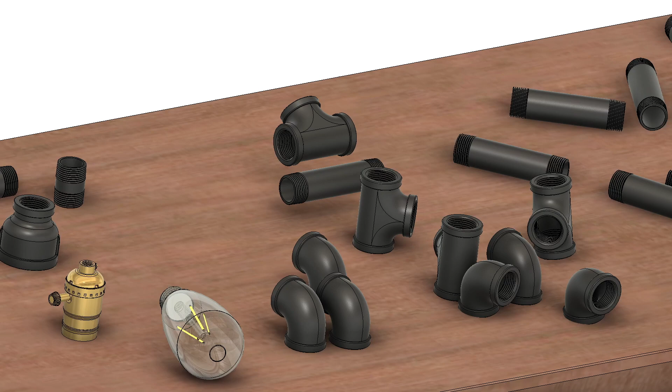In this tutorial, you will learn how to make this black pipe lamp. You will learn the fundamentals of downloading parts from an online catalog and using them for your lamp design, how to properly copy and paste, rename, and join together components so that you will be able to create your own style of lamp.

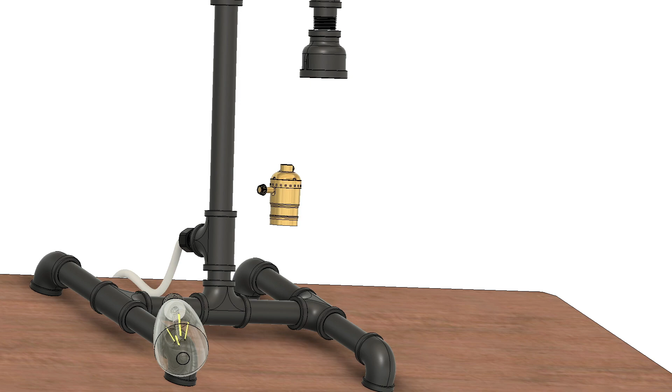So let's just take a quick tour of our lamp. We can see that there's various different parts here. We've got T's, we've got straight pieces, we've got elbows, we've got a reducer up here, we've actually got our fixture for the lamp to screw into.

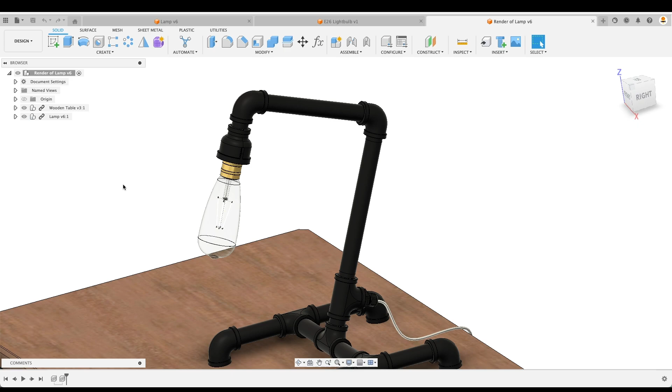We also have a couple parts over here that connect our cable. We've got a cable gland, and then we've got another fitting here to reduce from our 3/4 NPT down to a 1/2 inch. So now that we've taken a little tour, again, this is just a sample. You are more than welcome to do whatever searching out there on Google to find the lamp that you like and design it in Fusion 360.

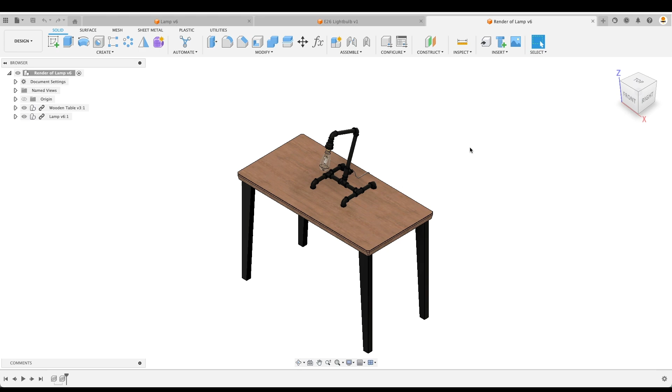So let's get to it. First thing, we're going to create a new design. What I'd like to do with all my students is tell them the very first thing we always do is save it. I'm gonna call this lamp design tutorial.

Now 99% of the parts that we're going to use to create our black pipe lamp are all taken from McMaster. So if we go to Insert and then McMaster-Carr Component, they're all taken from that. But here's the thing, McMaster has specific and specialized components that are hard to find in generic places around your town. So most of these parts, well, all the ones that we're going to bring up in our design today, will probably be able to be found at your local home center.

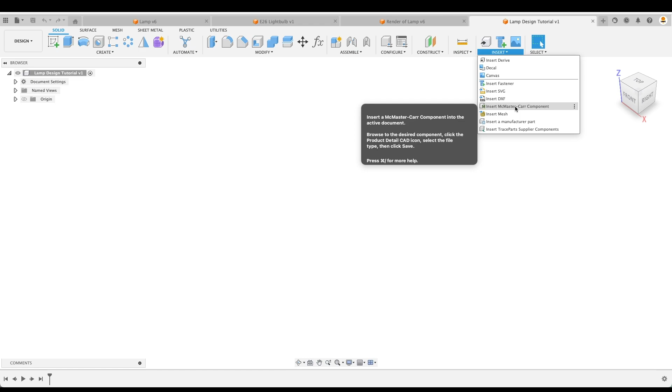I've actually made 2 lamps myself where I bought all of the black pipe at the local home center. However, if you don't have one or you think it's more convenient to buy something online, I've also included links below that will show you where you can buy different black pipe items online.

Either way, let's get into it. So the first thing we're going to do is insert. We'll go back here. We're going to insert our main component, and so this is what kind of brings our entire lamp all together. So we'll call it our foundation component.

Let's do that. We're going to go Insert McMaster, and right from our search menu, I'm just going to type in black pipe. There we go. And we have black pipe and black pipe fittings. So let's go black pipe fittings.

Then here in our left margin, we are going to go to our pipe size. Now at local home centers, you'll find anything from 1/4, 3/8, 1/2, and 3/4. We're going to make it out of 3/4. That's going to be a pretty beefy lamp design, but it's going to last a long time and it's going to be fun to put together. So let's just stick with 3/4. You could go with 1/2 as well. It's going to be a lot less expensive for 1/2, but let's just do that, 3/4.

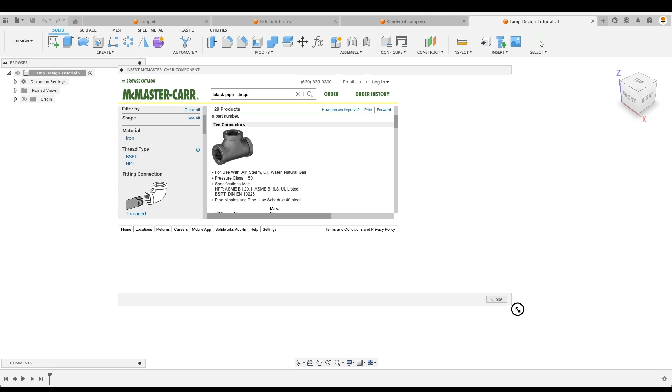Now, as we pick that, we can go to the first one here, low pressure iron and steel threaded pipe fittings. And then on the left, look at all the different types of fittings, the shapes that we have. And we're just going to pick our T. If we flip this upside down, well, we've got a T shape. So let's pick that. And then we're going to scroll down here. We can always make this window bigger. Let's just do that now. And here we're going to see the basic T connector.

If we go down, we have a right angle T. We've got inline reducers, right angle T reducers—they're slightly different—and dual T reducers. Let's just stick with the first one, T connectors, and we have 2 types of threads here.

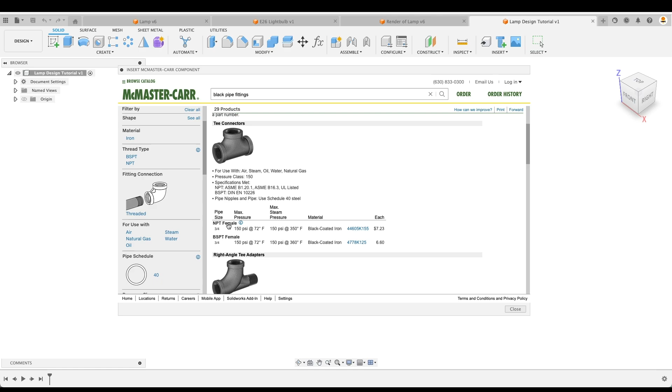Let's just stick with NPT. These are found most often, and we can also use them to connect some basic other components which we'll need to finish our lamp. So we just click on the part number, and now for our CAD file. If there's no CAD file here, we cannot download it.

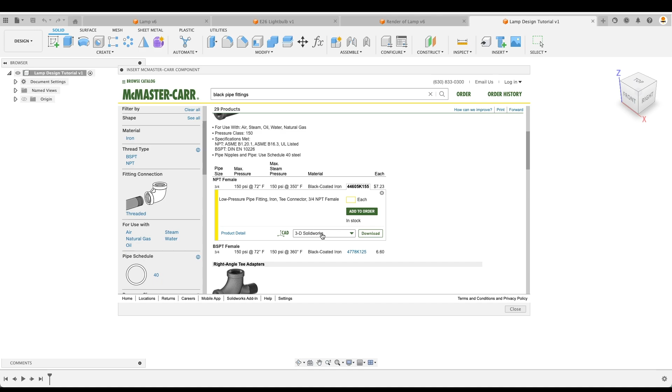There are many parts within McMaster-Carr Catalog which we cannot download. However, if there is a CAD file, this is great news for us—we can download it. But we're not running SolidWorks here, we're running Fusion 360. So what file do we pick? Well, most find that 3D step files are what is best to be used, and that's what I like using. So make sure to click 3D step and download.

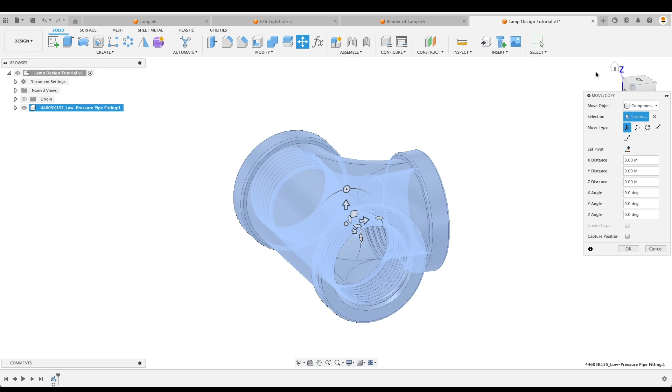So once we download this, we can change the angle. And again, if we were to look at our original lamp, this has a slight angle, and we're going to put it at 70 degrees and go OK.

Now, we have taught this before—we can actually move this part around. So we're going to capture the position. We can still move it around. So if we're moving it around and we want it to go back to its original spot, we just go revert.

Since we don't want this moving, it's going to be one of the foundation parts of our lamp, we have to go right click and ground. You'll see a little pin here beside our component, and now as long as I click on it and try and move it, it won't be able to be moved.

So before we move on, let's just take a look here at our part number. This part number tells us nothing about the part other than the part number out of McMaster-Carr. However, if we're going to go to our local home center, we're going to have to use terminology that they understand. So what I like to do is just encourage you to think, and this comes with experience as well, but I'm just going to call it a 3/4 inch T black pipe fitting.

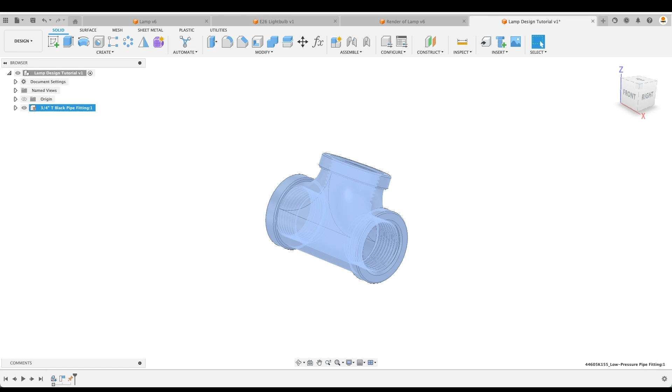There we go. If you were to take this to the local home center, they would be able to understand what you're talking about. But if it's just the number from McMaster-Carr, they would have no idea what you're talking about. So try and use terminology that someone else would be able to understand.

So the next item for our lamp are going to be these straight pieces right here. And they're threaded on either end so that we can actually thread it into our connectors. So let's do that—they're 4 inches long. So we're going to go back to McMaster-Carr.

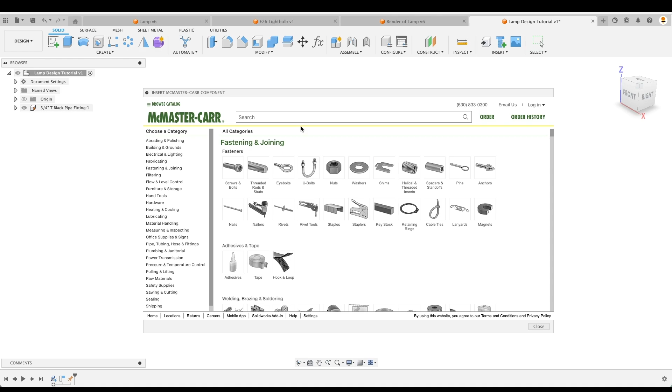Again, I'm just going to make this bigger for the sake of those tuning into this tutorial. So we're going to say black pipe, and instead of picking fittings, we're going to pick black pipe. We'll pick the first one here. Pipe size is going to be 3/4 again. And we're just going to scroll on down and look at what we have.

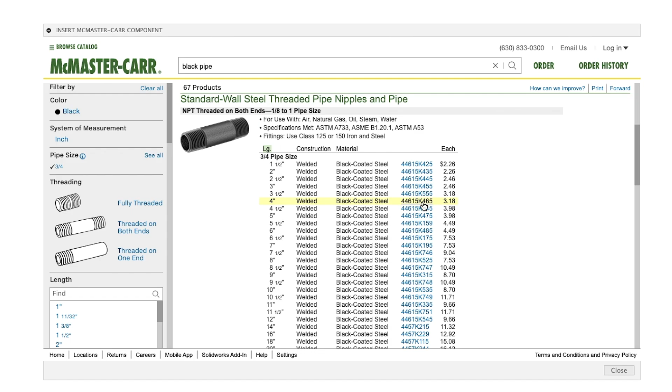3/4 NPT, and we're going to find the 4-inch length. You can see length right here, 4 inch. Let's select that. And again, we have 3D step file, so let's download it. And don't worry about position right now.

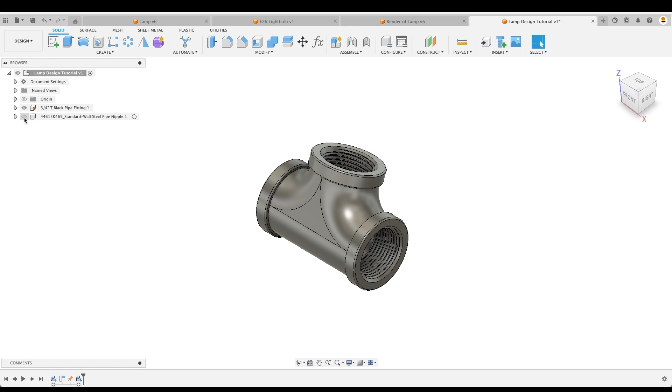Let's just go OK. Now, sometimes with Fusion this is a little bug that I've been finding—if this happens where your part disappears no matter what you do, oh there we go, okay, sometimes that works. We can just make it invisible and then visible. If not, just activate your component and go back to your master assembly and activate that, and it should come back on your screen.

We can click and drag this off to the side. Don't worry about orienting it—that's what joints are for. So we're going to go joint.

Now, here is something my students were having a difficult time with, is where do you join this? Well, if we were to join on our face here—and again, there's many ways of doing this—just to summarize, we can hover over the face, press Command or Control, depending if we're running Mac or Windows.

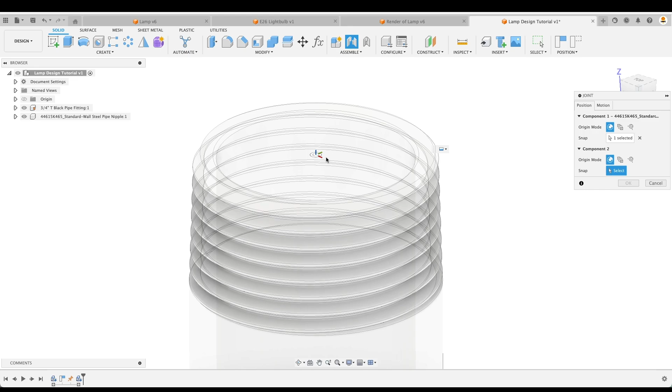If I hold down Command, I can select the middle point. If I don't hold down Command, that point will disappear. Or I can click the face, it turns blue, but all of the different snap points are still located on that face, and now I can pick the center.

But let's just say I pick that, and I pick this point right there. Well, what's the problem? They're not actually connected like they would be in real life. So we can't select that point on our pipe to join. What's the point that we need to pick? Let's go back to joint, and the shortcut, everyone, is J.

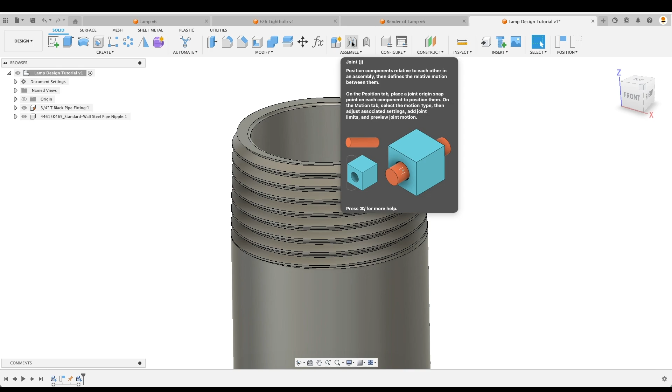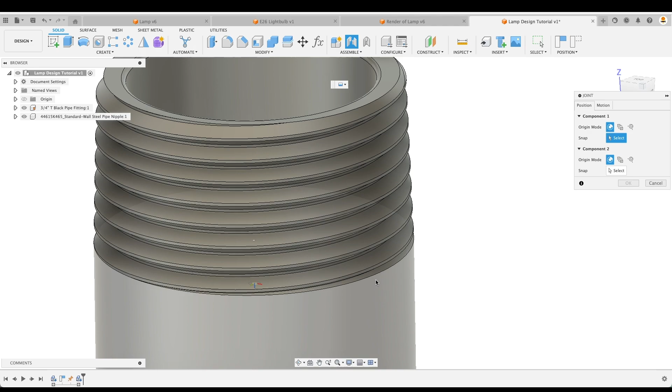We can see that right there. So J for joint. Now, I need to pick this very bottom circle right here. As I do so, you can see that the snap point is in the middle of the part. If I hold down Command, there's the snap point. It should be in the center of our part. But look, if I pick the wrong point, look at where my snap points are. It's off on the side. That won't help us. We need to pick this line with the snap point in the middle. And now I'd be able to pick this face, center, click again.

Sometimes our pipe flips the other way. If that's the case, we just go down to our joint dialog box. We're going to flip it. And there we have it.

So another principle that we're going to use here, eventually I'm just going to design this. You're going to see me finish it almost in its entirety, but just to talk about some of the principles.

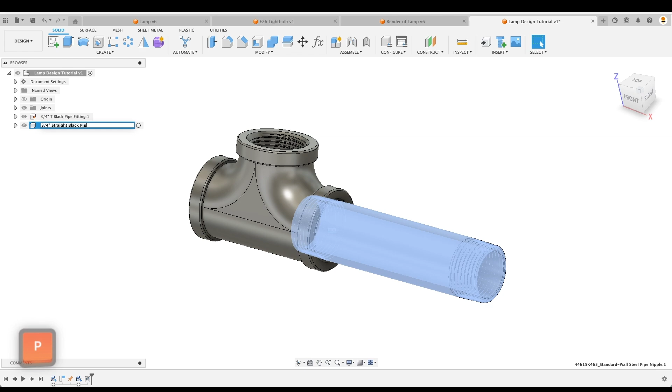Let's go up to our naming convention first. We're going to call it 3/4 inch, and here we're going to call it straight black pipe, just straight black pipe. There we go.

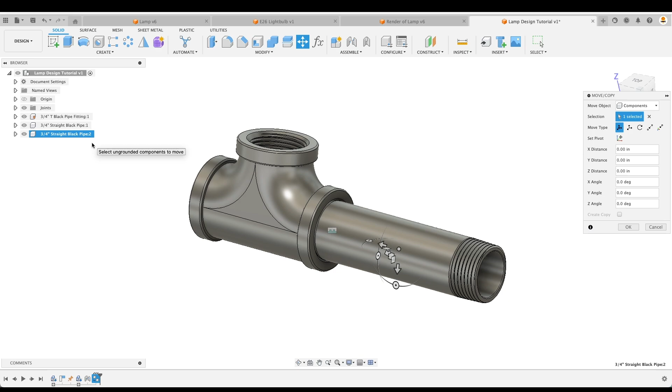Now a principle here is if we want to copy it, we need to go right click, copy, and there's our shortcut copy. We can just right click on our screen and go paste. And as we do so, look at what happens. We've got straight black pipe 1, straight black pipe 2. Every time we paste it, it's going to add an incremental number to the next in the series, which makes it very easy to find what we're looking for.

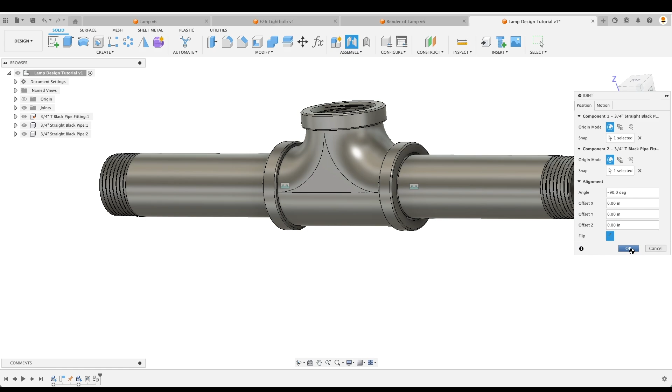So let's just move that pipe off to the side. We're going to do the exact same thing. Joint, make sure we pick the right spot. And we're going to pick this face, the center point, flip it. Oh sorry, there we go, flip it. And we're well on our way to making this thing work out really nice.

Again, we're at 90 degrees right here. If we look back at our lamp, we've got other T's here which are in line horizontally. So let's go back there.

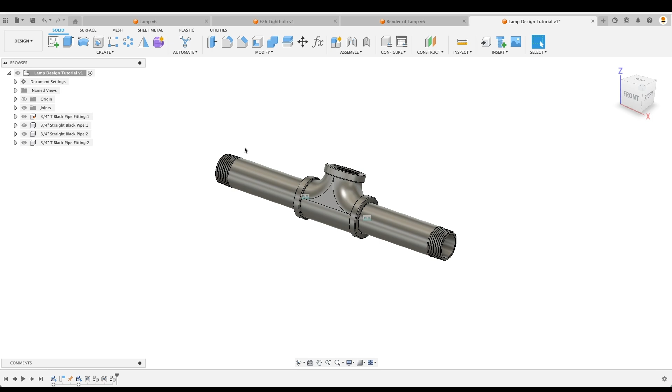We're just going to copy our T's. If we're trying to find a specific item in our browser, we can just click on it and look what happens. We have these dashed lines, these angled dashed lines over here. That's the part that we want to copy. So right click, copy, right click, paste, and we're just going to do 2 of them. Right click, paste again. So now we have fitting 2 and fitting 3.

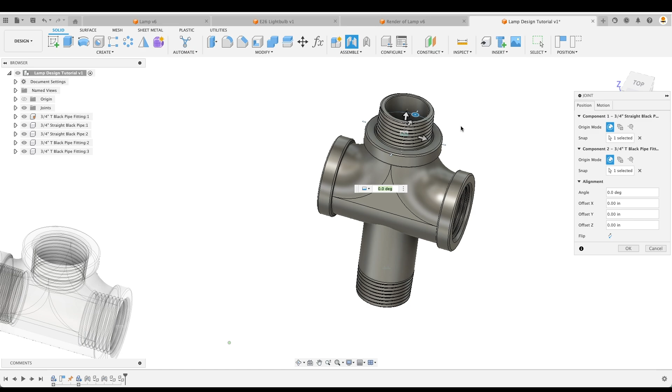We're going to click fitting 2, move it off to the side, fitting 3, move it off to the side, and let's join these now. So here we're going to do the same thing. Pick the circle on our male pipe there. I'm going to pick this guy right there. And let's see if we go okay.

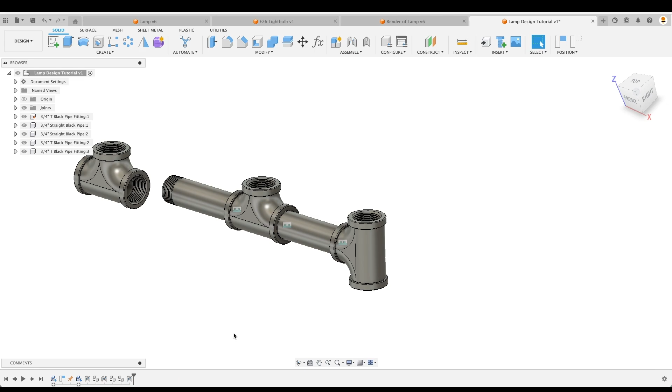Well, obviously this is not lined up properly. So now we're getting some issues. Let's go here to edit. Now that should not be doing that. So let's just go back in time here. Okay, so that shouldn't be moving. Why is it doing that?

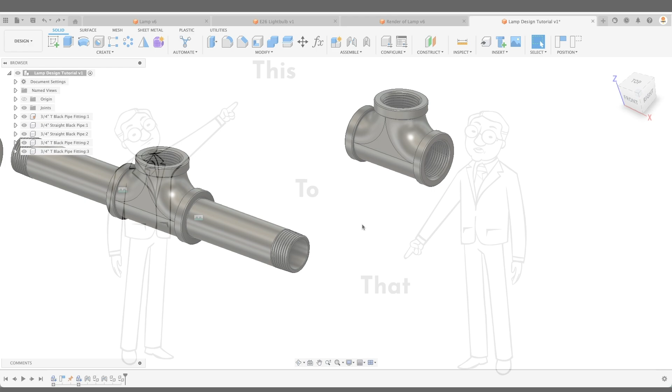Okay, let's move. Oh yes, we have to move. Okay, so here's a good lesson. I clicked on the pipe first and then our T fitting. Remember the lesson here is when we're joining, we move this to that. In English, we say this to that. We never say that to this. So we move this floating piece to the one that we want stationary. Again, move this to that and it won't mess up on us.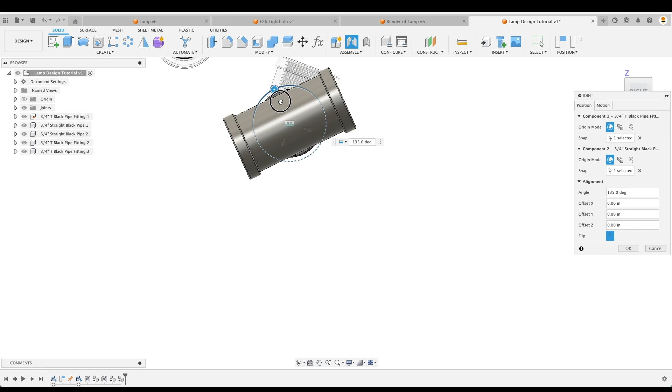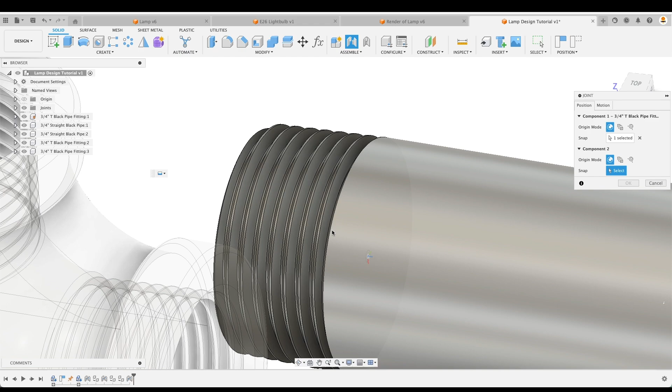There we go, we can just adjust our angle. If we want to make it right, we go -70. So if this pipe was at 70, we go -70 to make it horizontal. There we go, let's join the other side. See here, I'm picking the wrong snap point. I need to move over to our circle so the snap point is in the center of our pipe. There we go, and here as well I need to make sure it's horizontal, so we're at 70 degrees. There we go, we're well on our way.

So quickly, I'm going to copy and paste these straight pipes. We want to make 4 of them. If we look back at our lamp, we've got 1, 2, 3, 4. So let's quickly do that. I'm just going to go Command V, Command V, Command V, and that quickly pastes those items. So move those off to the side and let's join them together.

Okay, as you can see, all of our joints are working out really good so far. So the next thing we need to add are these elbows, the 90-degree elbows over here.

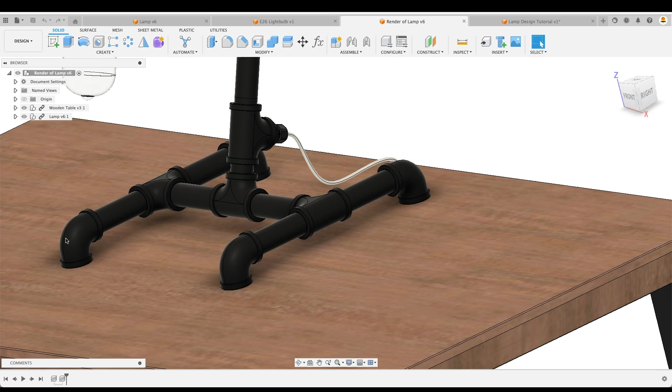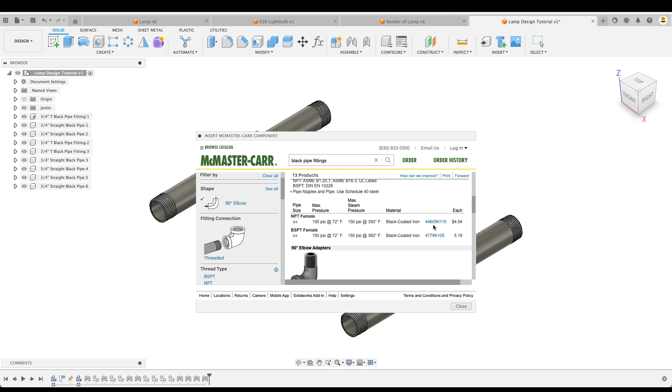So let's go back to McMaster and find those elbows. There we go, in our shape we can just pick 90-degree elbow. And it's good to familiarize yourself with different types of fittings here. But let's go to our elbow, and there we go, NPT female. And here I'm not even going to worry about orienting it, I just want to go OK. Let's not worry about renaming it right now because I'm going to show you something that's really cool.

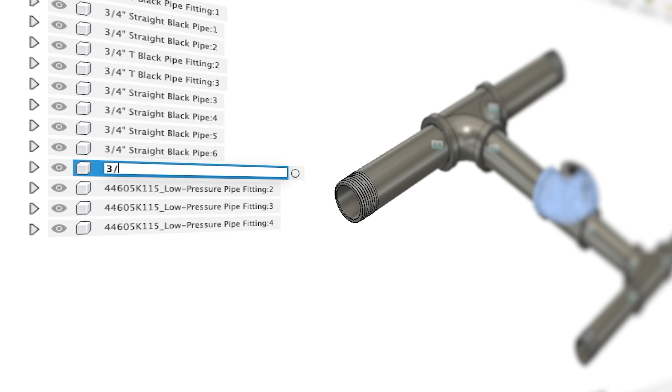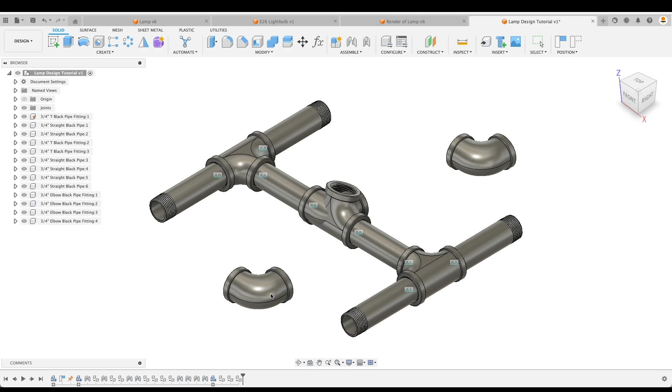We're just going to go right click, copy, Command V or Control V. Okay, 1, 2, 3 more, we've got 4 of them. Now because we've copied and pasted, we can right click and call this 3/4 inch elbow black pipe fitting. Now look at all the others in our series here - because we've copied and pasted them, if I hit enter, they all update correspondingly. 1, 2, 3, 4. So let's pick number 1, I'm just going to move those off to the side in their locations, and let's assemble.

Well, would you look at that? It's coming along very well. So at this point, it's good to save.

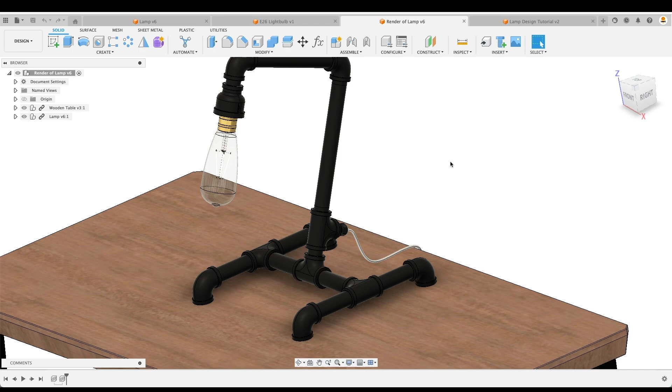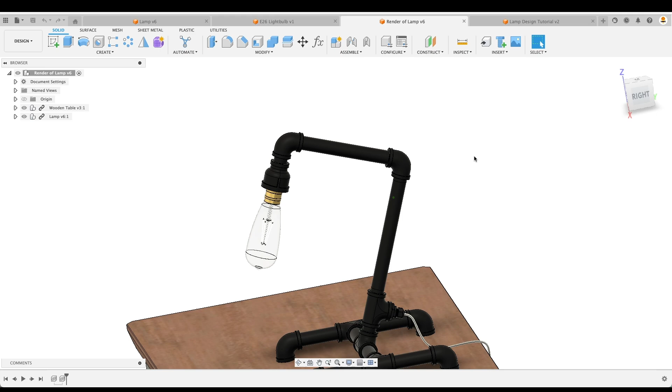Now there's no right or wrong way of doing this. I just looked at an image of a type of lamp design on Google that I really liked, and I just created it from there. I guessed at the lengths, and so that's what you can do too. So now we've got another, this is just a short piece, I think it's only 1.5 inches. And this one over here is 10 inches long, and then we've got another T. So let's download our 1.5 inch length and then our 10 inch length as well. And I think this one, I want to make a little shorter actually, maybe 6 inches long. So we've got 1.5, 10, 6 inches, let's go there.

And I just realized I forgot to call it our 3/4-inch straight black pipe, so let's do that now. There we go, okay, so we've got our 1.5. Let's download our 10-inch.

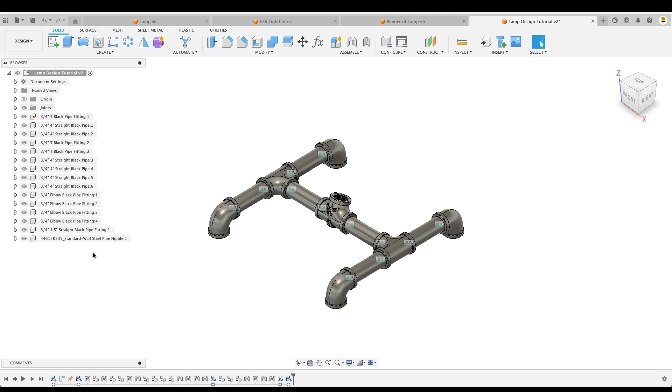We're going to do the same thing here. See there, it disappeared - we can just activate our main assembly and it should reappear. So we can copy and paste our text as well. Command C, and then Command V, and we're going to call this 10-inch straight black pipe fitting. And we'll do the 6-inch length as well.

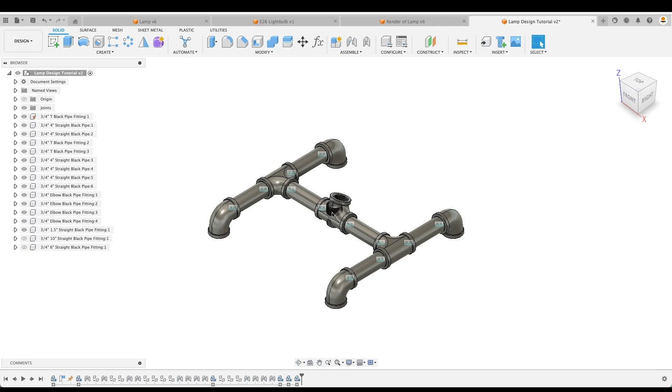Okay, so we're just going to hide those for now. Remember, if we're finding it hard to grab the part we want to move, we can just click on it in our browser. It will turn blue, and that will be the part that moves for us. So let's assemble this, we'll put another T there. We go back to our T fitting, copy, paste.

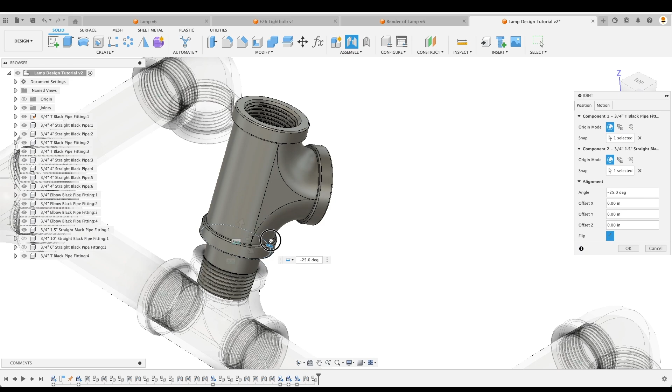So if you're ever unsure about the angle, just go to the proper face. Let's go to our back, and here it's the proper angle. So again, if we're unsure about where this should be positioned, there we go. This one's going to be at 0. Sometimes it will say 90 or 180 depending on how we join it. But there we go.

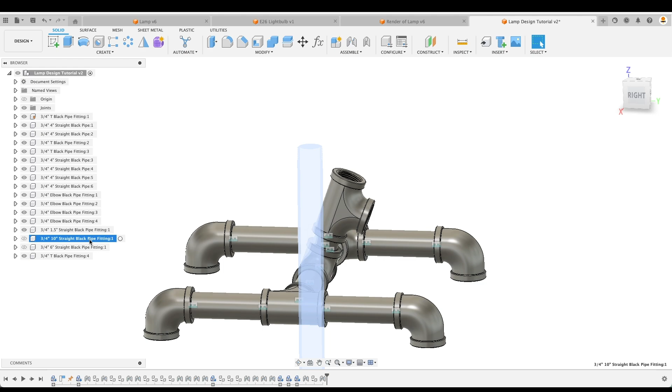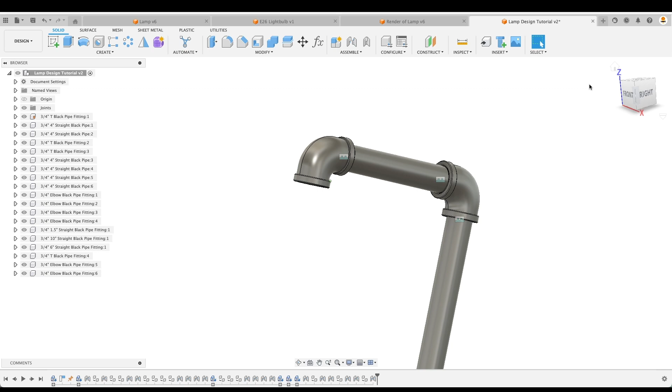All right, let's go to the 10-inch here. Make sure we make it visible. Great. Now we're going to put our elbow right there. Now the 6-inch piece. Another elbow. Okay, at this point, let's save our lamp. Now you can see that we have a ton of the little symbols here for our joints. We can just turn those all off by making them invisible. There we go. Let's go back to our lamp here.

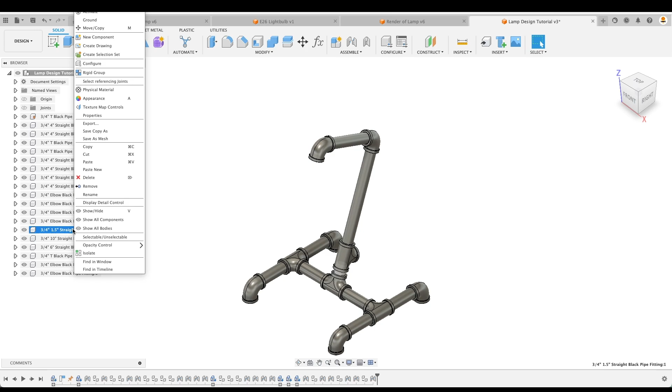Now we have another short piece, and we have what's called a reducer. And then we have the fitting for our light bulb to screw into. So let's just use our 1.5 inch length, and then we'll have to get this reducer right here as well. So let's do that. And this is where it's very handy to use a good naming convention for our parts. So right click, copy, right click, paste. We'll join that.

Okay, so before we find our reducer, we have to look at the actual size of this little lamp housing here. I should go to the lamp. That's the right one. So if we zoom in here, the reducer that I found is 1.25 to 3/4, and that depends on the size of this little lamp socket. The reason is when I created a lamp in the past, I ended up just using a little bit of epoxy in here to connect the lamp socket into the reducer.

Now this would be really good if you went to your local home center and you found this lamp socket. You could always compare the size of it to the reducer to make sure to grab the right reducer size. However, we're just going to follow suit with this tutorial. Again, in real life, I don't know what they're selling at the local home center. So you just have to compare. You're going to have to grab this package. You'll probably have to buy it ahead of time in order to open up the package and then compare it with the actual black pipe.

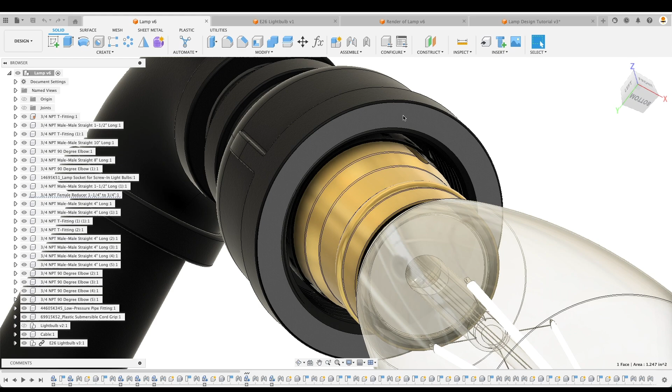The lamp socket is in a package. The reducers are rarely in individual packages. But anyways, later on, you can just epoxy them together. Once you've run your cable, put a little bit of epoxy so that if you mess up, you can always remove it easily, rather than filling this entire thing with epoxy, and then it's a disaster to try and fix it if needed. So let's do that again.

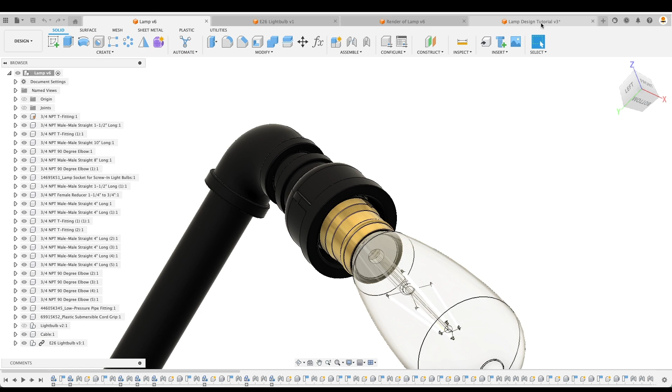We've got a 1 1/4 to 3/4 reducer. So let's find that. So there's a straight reducer right there. That's what we're looking for. And we want to go 1 1/4 to 3/4. So always go largest to smallest. That's the one. Step file.

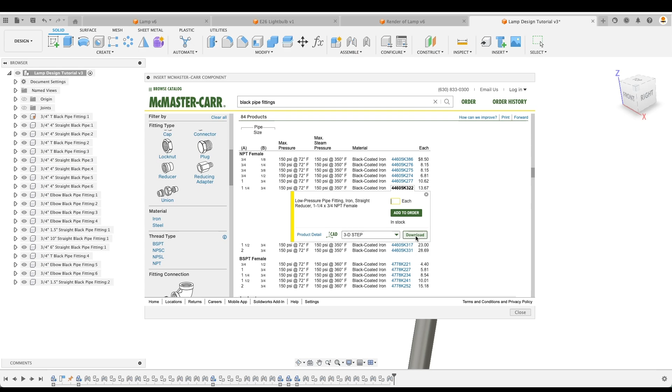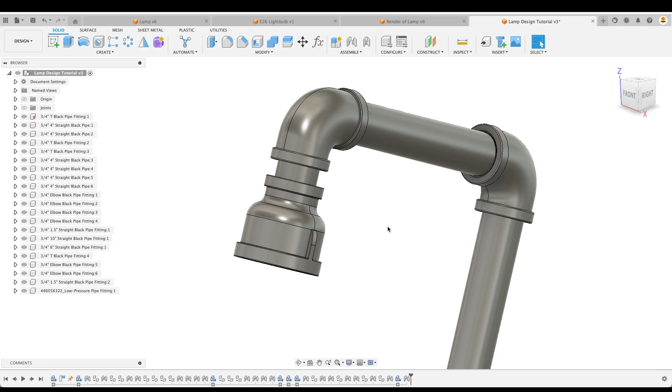Now, just to clarify, I'm sure there's going to be a ton of comments out there. They're going to say, well, how come you didn't use a female to male reducer? Why did you use this little part right here, the straight piece? Well, absolutely, you can do anything you want. This tutorial is just showing you basically how to make this sort of lamp, and you can find whatever fittings. There's a million different types of fittings out there. Just make it work. However you want to design it is totally up to you. So let's make sure we rename that as well. We're going to go 1 and 1/4 to 3/4.

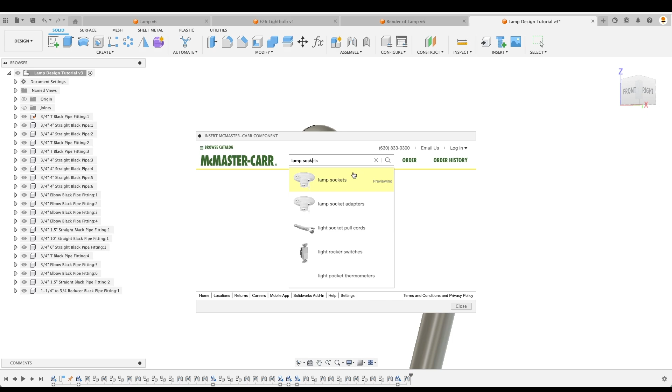So now we want to add our lamp socket. So let's go back to McMaster-Carr and we can just type that in, lamp socket. And this doesn't look like the same lamp socket, but that's okay. Let's just pick it anyways and look what comes up right there. So we can use one with a knob, or with a pull chain. Let's do knob here. And this should have a step file, which it does. Excellent. Let's download it. Move that off to the side.

And now let's assemble. And I'm just going to pick any spot on it over here. Probably this. Make sure that the snap point selects the inside of our part rather than over here, which our snap point will pick, one of these points.

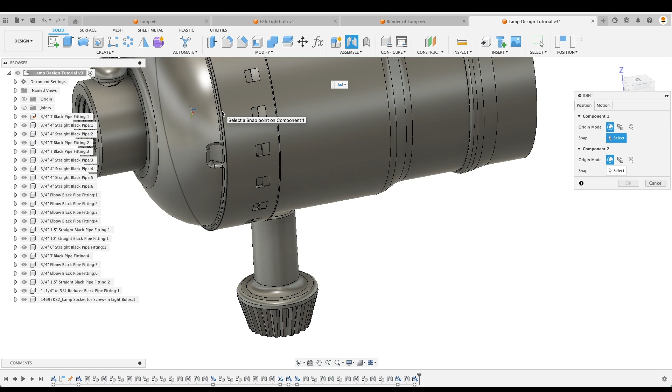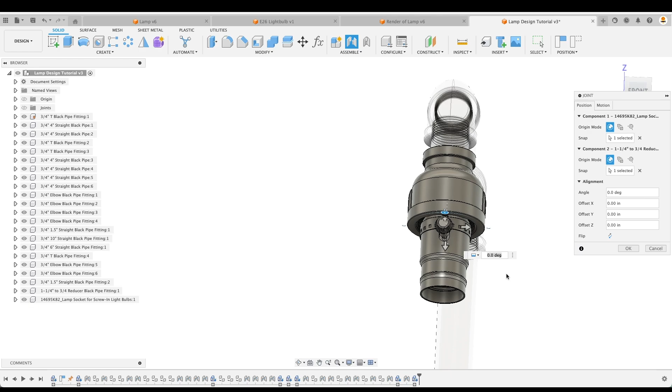But make sure to pick something with a diameter or some sort of curve where it will pick the center point. There we go. And we're going to do the same thing over here. I don't know why it's not moving for us here. Oh, there we go. Okay, let's flip it. Great. Okay, so just to make it more aesthetically pleasing here, I'll move the knob off to the

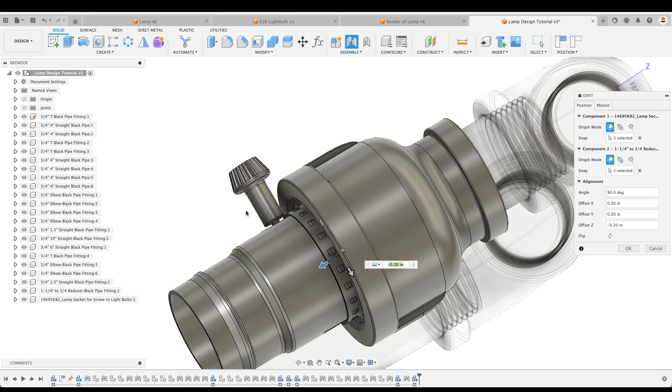side. And again, I want to stress this, that this is probably not going to work in real life, but we'd have to find the proper reducer in order to fit with this part. And I can probably put this in just a little bit right there. There we go. We can still operate the lamp. And again, this is going to be full of epoxy or some other way in order to attach those two together.

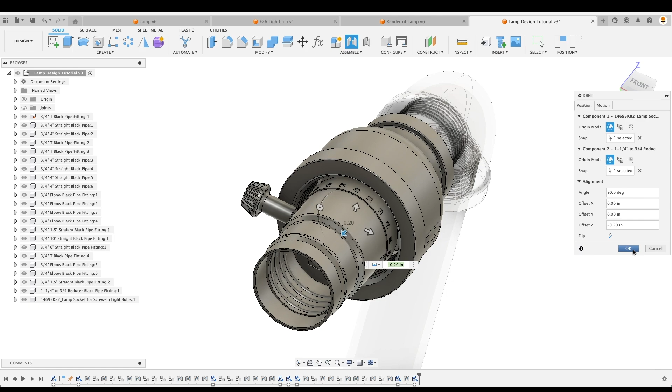But sometimes they're quite expensive and it might be a whole lot cheaper just to get the socket and the reducer and epoxy them together. But this is totally up to you, whatever you want to do.

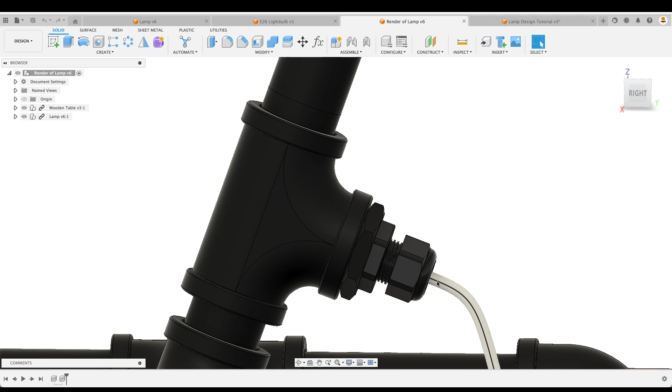Okay. So now if we go to the next part of our lamp, which is right over here. It is a component or an item that we can connect our cable to. Obviously, we want the cable to be snug so that if it gets pulled, it's not going to rip out of our lamp. But we want it to be held nice and tightly, and this is called a cable gland.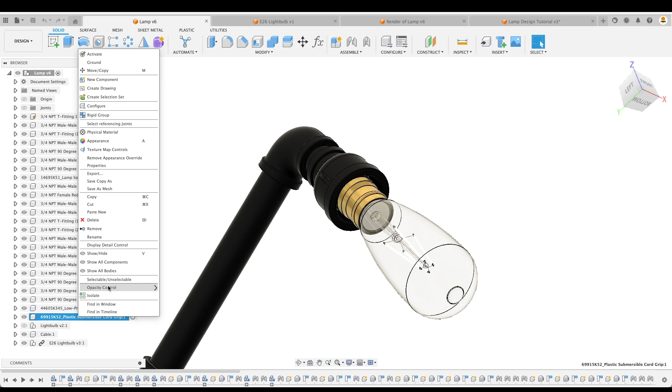Now, as we look here, our cable gland is actually quite a bit smaller. And if we go to our lamp, I'm going to go down to the cable gland here, and we're going to isolate it. There we have it. Okay, so our cable gland, which we'll download in a second, if I expand this, you'll see that it has an extra body. Actually, it has 5 bodies in it.

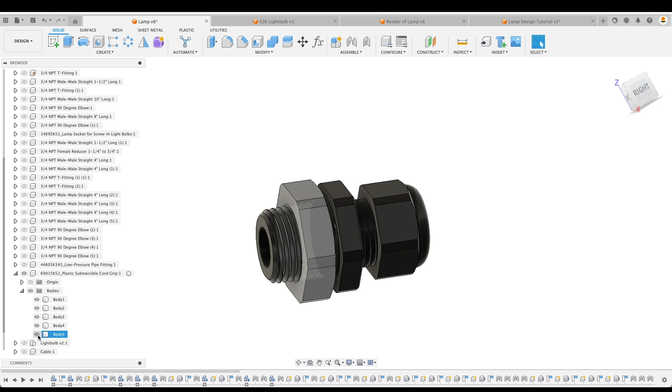Well, this is actually a nut here, and we use this in order to fasten the cable gland to some sort of thin wall material. But since we don't need to use this nut, we can get rid of it, and this is an NPT thread. This will screw right into our black pipe, no problem. Let's just look at our other bodies here. Let's turn that off. Body 4, this is a solid piece of plastic.

And then we have the front nut, which as we tighten this, it clamps down on our little grommet here, and it tightens down on the cable itself. Then we've also got an O-ring, which makes it watertight. So we can just toss this nut or just forget about it. But this is actually a 1/2 inch NPT.

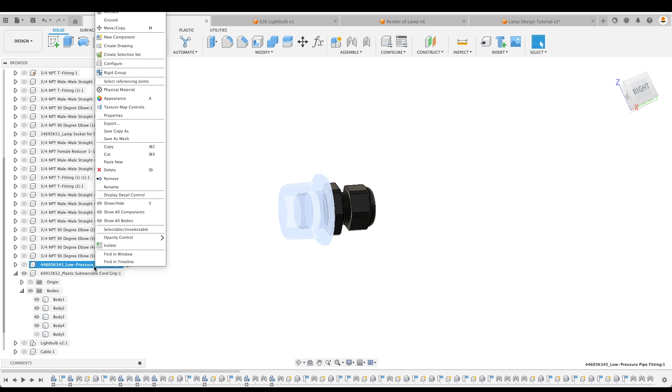If we right click here and isolate, we can see that we have also a reducer in size. It goes from 3/4 male to a 1/2 inch female. So let's find that. Going to go back to our lamp design, and this one we can just leave with that type of naming convention. That's fine. Insert McMaster-Carr.

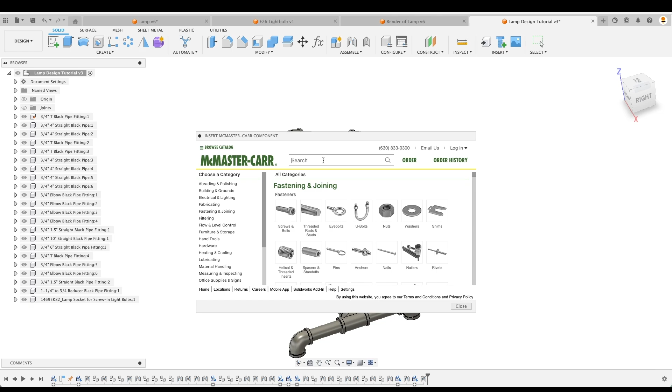Let's go back to black pipe fitting. We want a 3/4. And again, even though this shows an elbow, this is for all of our fittings. So we're going to click on that. And here we have a bushing. So we want straight reducing adapter with hex body. Perfect. And this is going to be 3/4 to 1/2.

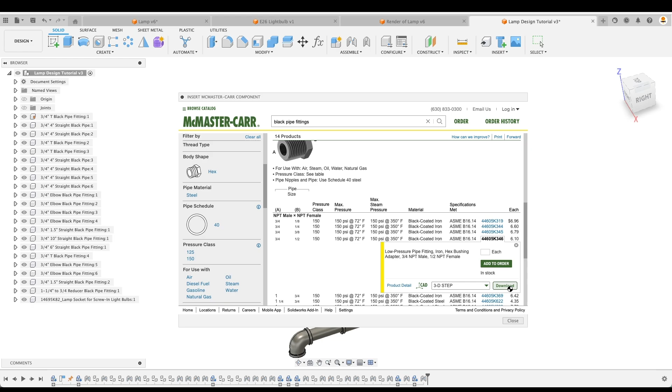And I'll show you again why we're reducing it to a 1/2 inch. We'll look at the cable glands in a moment and show you why we need to do this. We'll just move that off to the side and we can join this right away. Well, let's rename it first of all. We'll call this 3/4 inch male to 1/2 inch female reducer, black pipe fitting, and we can join that again.

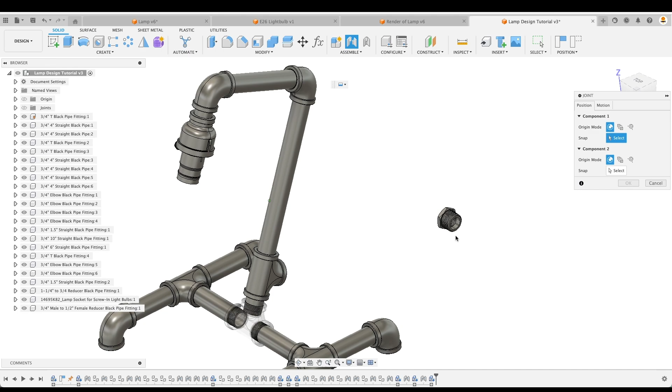So here we're going to pick that face and then the center point. Pick that face, the center point. They should mate up. There we go. Okay, and now we can add the cable gland. So we'll just type cable gland, and there we have all sorts of different options. Let's just pick the first one. And here we go.

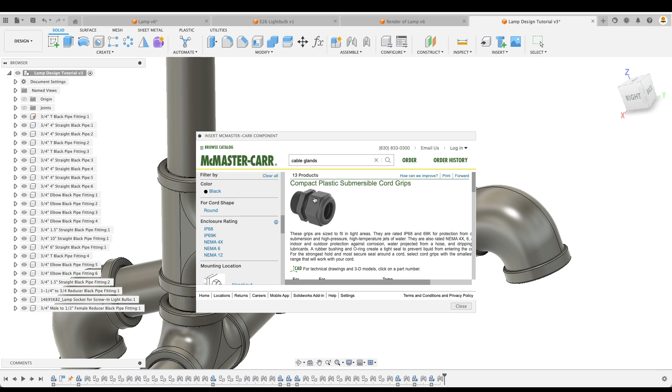We're going to pass by our cord OD and our knockout trade size, our material, our shape, and we are going to find our thread type, NPT. Pick our first one, and look what we have over here. So our NPT threads, we've got a pipe size of 3/8, 1/2, 3/4, but this is our cord OD. So you can see that with the 3/4 inch NPT, our cord diameter is 0.35 to 0.63, or we can even get bigger than that, 0.51 to 0.71.

Those are really big cables. So that's why we're going down to a 1/2 inch NPT. Actually, it'd probably even be better if we went down to a 3/8 NPT pipe size, but this is just showing you that we can think ahead. We can look at McMaster and find the right parts for the right job. But let's pick this 1/2 inch here. The cable size will be a little bit smaller in diameter.

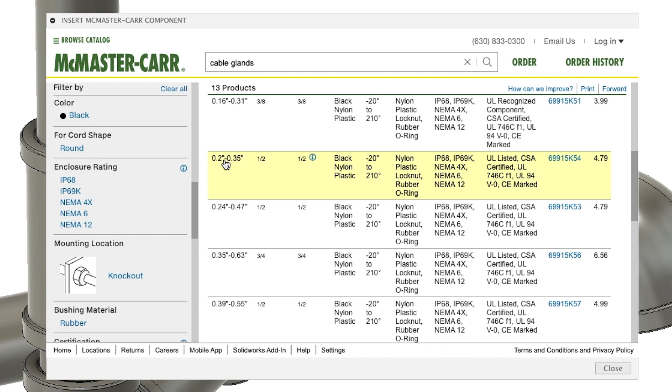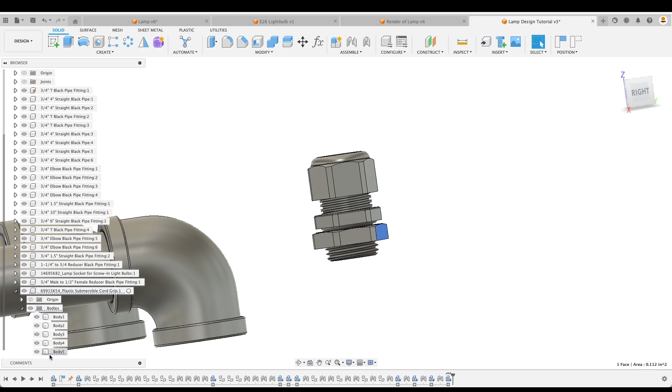We're going to pick that part, step file, download, and because we've got the nut over here in the way, we're just going to expand that in our browser, find the body. Again, if we don't know which body it is, we can just single click. It will show up in our browser with the staggered angled lines below it, and we can just hide it or go remove. What happens if we go delete? It will delete the entire item, the entire part there. So we want to go remove, and it will just remove that individual body. It'll actually put it in our timeline as well.

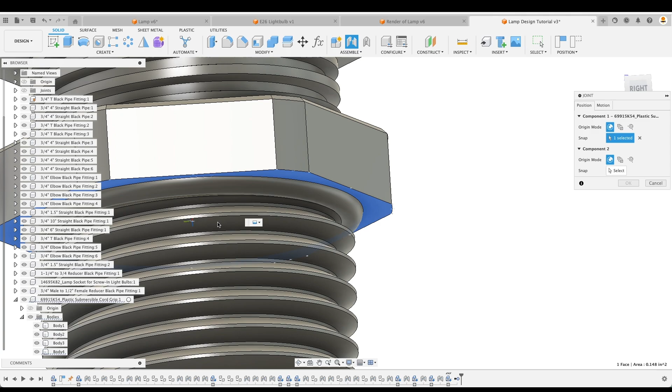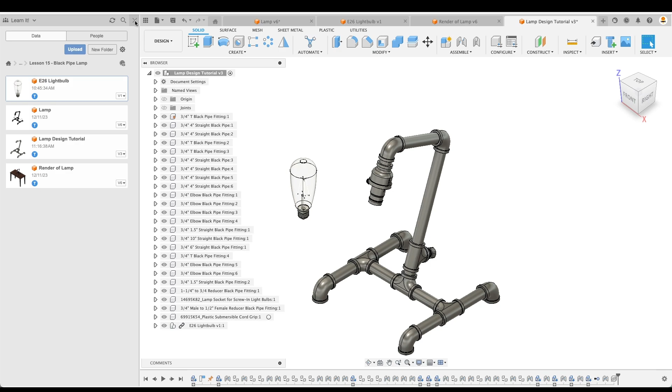So let's mate these together now. Pick that face, then the center point, and over here as well. And there we have it. So this is our completed lamp. Now we'd also like to just put in our light bulb as well. So to do that, I actually spent quite a bit of time making a light bulb, and here it is, the E26 LED light bulb. We're going to insert that into the current design. Again, just move that off to the side. I'm going to close the data panel, and we can joint this together as well.

So there we have it, our finished black pipe lamp design. I think this is looking pretty cool myself. However, on the internet, there are so many different amazing designs out there. There's ones that are shaped in little characters. There's others that can be incorporated into shelving or put on the wall. The design possibilities are endless.